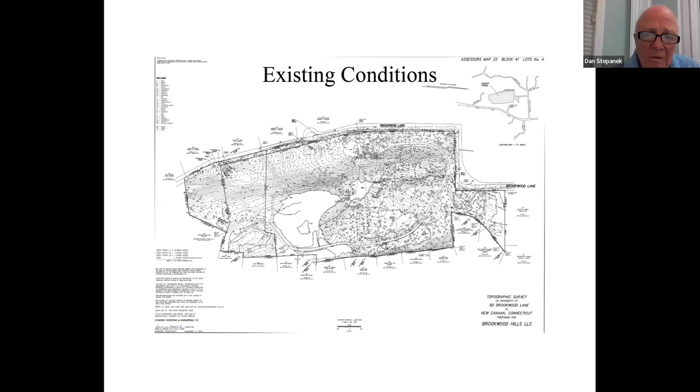I did the wrong thing first. Oh, looks like success. So did you stop sharing, or stop co-host? I think I may have logged out. We'll make sure we get him out later. I don't want to take everyone's time. I don't think Don's getting it either, but now he may. You should all be seeing the slides at this point.

This is the existing conditions survey I mentioned, just to show the layout of the existing lot. Then this is the topographic map, so you can see the low point on this lot.

Okay. Thanks all for your patience. Bill, you'll have to tell me when you want me to go.

Good evening, I'm Bill Kenny, principal of William Kenny Associates in Fairfield. I am a professional wetland scientist, soil scientist, and landscape architect. We were retained to help with this project in a number of different ways.

Initially, we were retained a couple of years ago to go out and map the wetlands on the property, which we did. More recently, we were asked to expand that work, reviewing existing conditions and not just looking at where the wetlands are, but their conditions and functions, and then help develop a plan that we believe, in our professional opinion, would have a net benefit at the end of the project.

We worked closely with SBP Homes, with D'Andrea Surveying & Engineering, and with Amy in developing this plan. Based on our review of existing and proposed conditions, it is our professional opinion that there will be a net benefit to the wetlands on the property. The wetlands will be expanded and their functions improved in certain areas, so you have a net increase in area and a net increase in function.

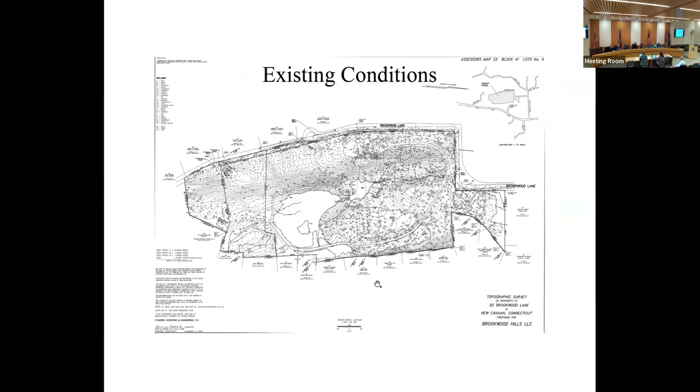So we have the existing conditions map. Now we'll go to the next map, which shows both existing and proposed conditions. North is to the right and south is to the left.

The property has had significant alterations over the many years. The existing home was built sometime around 1938.

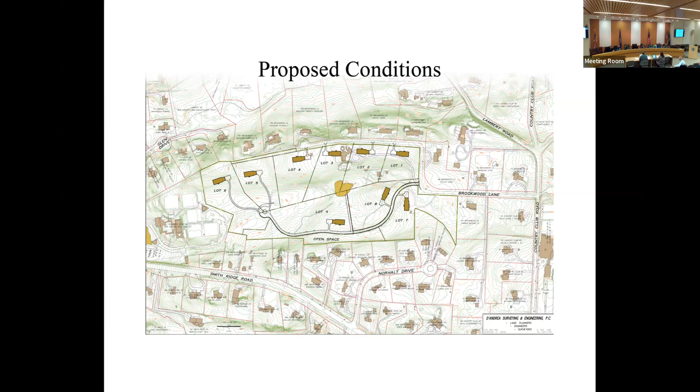Maybe we have an aerial. Keep forward the other direction, please. That's the next one. Okay, keep going. Keep going. Okay, there we go. Oh wait, did I open the wrong one? Is that the one?

This aerial photo from 1934 shows the property as mostly second growth forest with some pasture in the southern end. North is pretty much to the top of the page and south is to the bottom. You can see at the top a little bit of the country club to the north.

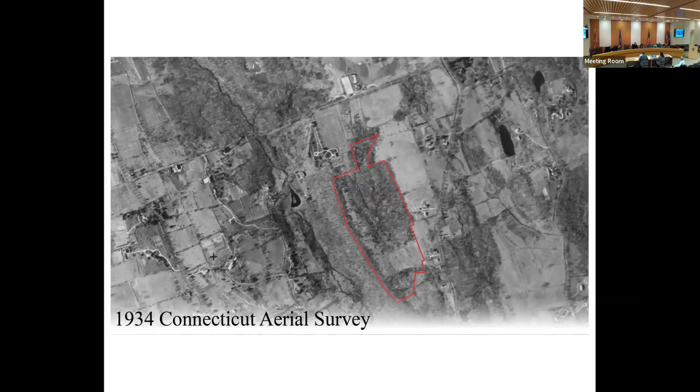The property is below that. At that time there were no significant improvements on the property, but shortly after this photo a significant amount of improvements were made, including quite a bit of work that altered the wetlands and streams on the property. We can start to go through that.

Here's an image with a USGS topographic map as well as a 1951 aerial photo on the right. You start to see the improvements to the property in these images—on the left-hand side you have the estate house on the western side, and then there's the small pond in the middle.

On the eastern side you can see the shared driveway that comes in. At that time, interestingly, that driveway extended all the way down to Smith Ridge Road, through what today goes through the field club in that area. I believe at that time it was probably the primary entrance to the estate house, extending up the east side, wrapping around the north, and back down south to the primary house on the property.

Something to note about the property is that it's really a broad valley, with a broad drainage corridor extending from north down to south. Slopes primarily drain from west and east toward the center of the property. There's a ridge line on the west and a ridge line on the east.

And pretty much all the water is draining back into the property on the site. So the various homes that border the property to the west, north, and east are either draining away from the property or they're draining onto our property. But in most cases, we're not draining to those residential properties that surround the property to the west, north, and

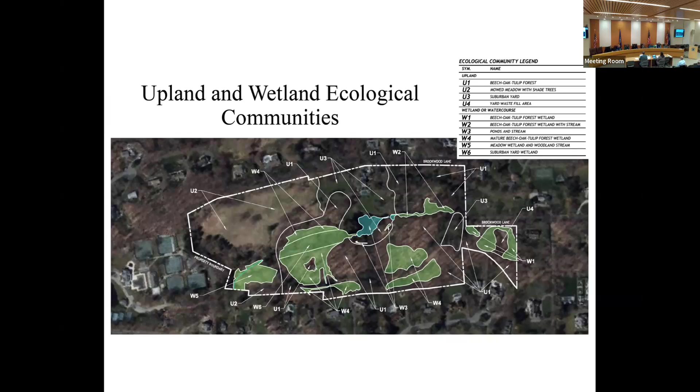So what I'd like to do now is to review with you the different ecological communities that we identified on the property. We found in general there's 4 upland communities and 6 wetland communities. We differentiate these primarily by vegetative cover, but also land use activities that affect that. So we'll quickly review through the upland and then spend a little bit more time on the wetland. Next slide.

Yeah. Oh, I gotta push my own forward.

The shrub layer is like you find throughout many areas in Fairfield County, a lot of invasive vegetation in the shrub layer. And then the forest floor, the ground cover, is a mix of invasives and native vegetation. Next slide. You got it.

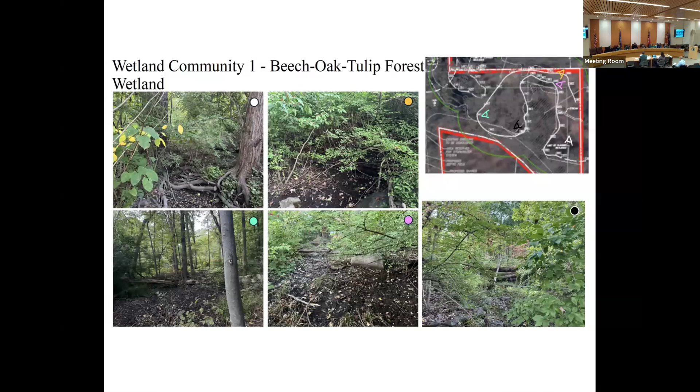And as we go down this channel and make our way all the way down to the southern end of the property, there are different piped networks coming in and out of the stream for various reasons. Some to help enhance a pond that was made, and others to drain wetlands that are nearby this stream. So they wanted to keep the water in the stream and in the ponds that were made, and in many cases get the water out of the wetland areas.

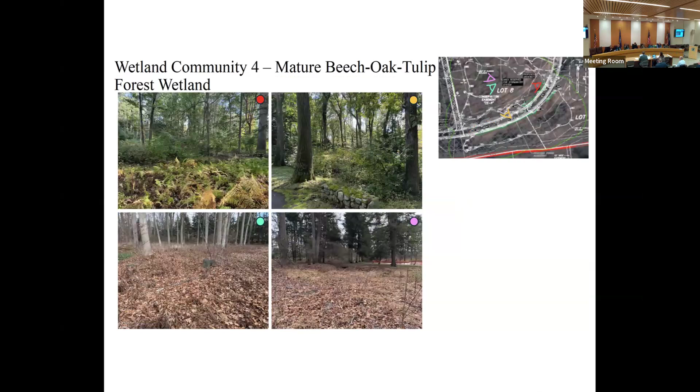So we have a number of photos as you go along. You can see where the pipes are; these short segments of walls are where the pipes are. These are head walls and end walls where the pipes go under the drive.

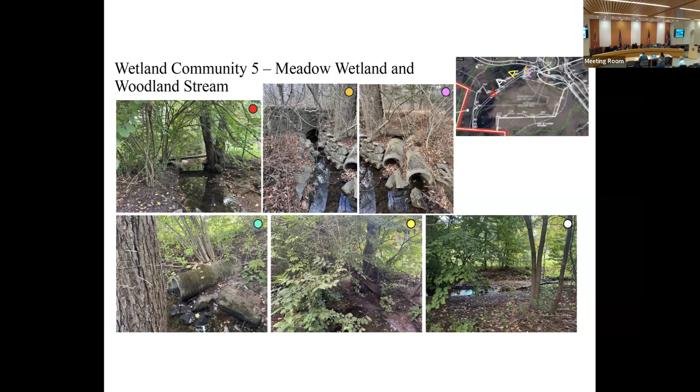And at the very end of that central drainage corridor, where the drive currently and historically came down, it ran north to south, and then it turned west to come down through the center of the property. This is where the pipes from the upper pond area come out and discharge just below where the drive crosses east to west. In this area, there's been filling around the channel, and these pipes outlet into that channel.

Immediately east of this is a wetland meadow, adjacent to the upland mown meadow on the property. This meadow is similar to that suburban lawn wetland where it has been drained in many cases, and there's a shallow layer of fill. Those improvements were done to make the meadow pasture more usable for past farm uses, so it's much drier than it historically would have been. It's in the southeast corner of the property, an old altered wetland meadow area.

So that's a summary of the existing conditions information. Under proposed, they're proposing improvements to the existing driveway. For the majority of the driveway, it includes expanding the width from 14 to 18 feet.

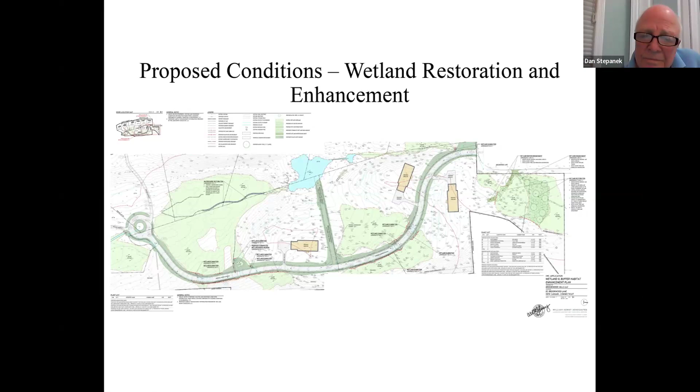Thank you. Commissioner Sanford? Yes, hi. I guess we're looking at reduced copies of some big maps here. We had two maps that we merged together to create this map. I just have a pretty basic question as to how I can make out where the existing driveway is and where the new driveway is. I think I can identify the new driveway, but I'm not clear on that on the early map.

Let's go to Lon's plan. Let's go to Lon's. Okay, this. So, trying to see what the easiest one is for you to see. If I can sort of explain, you can kind of see it. See existing conditions map. All the maps are online, so you can zoom into them. That might be easier for you.

But basically, the only part of the proposed driveway that doesn't follow the existing driveway is right when you first come in the stone gates. And that's because the fire marshal wanted a different angle when they come into the property. So there's just a slight area there where it does differ from what's existing. And then it follows the path of the existing driveway all the way through.

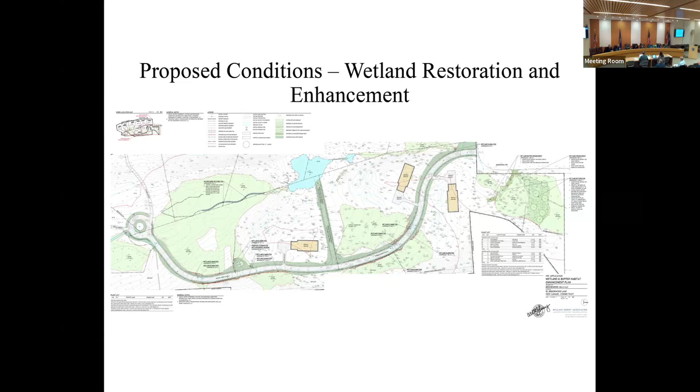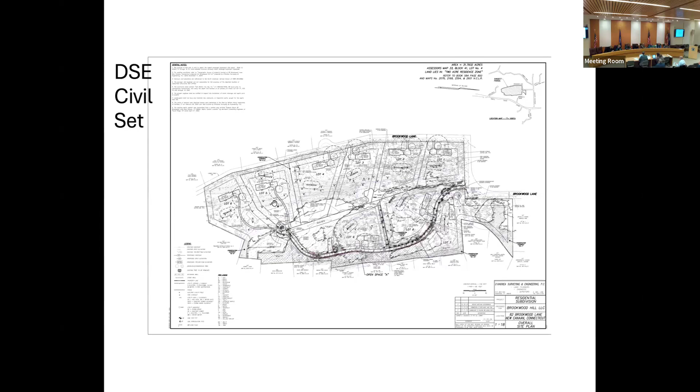Sure. Really what it comes down to is we're trying to use this. Let me go to the proposed survey. So part of what we're trying to do is, in particular with lots 1 and 2, I'm sorry, not lots 1 and 2. Are you able to zoom that in? Let's see. There you go.

All right. So in particular with the last 2 lots, the 2 furthest west lots, 5 and 6 on the map that we're looking at right now, these 2 lots actually have their legal frontage, and this is more from the zoning standpoint, on the access way that you see to the west. So the alternative would be to bring in driveways through there, and as you can see, even from this survey, a number of trees would need to come down through that area.

Or there were other plans that I've seen in the past that had driveways coming more through the center of the property. So there are alternatives that we have looked at, all of which involved more disruption to this property. And the point being that, as Mr. Kenny began his presentation, the wetlands on either side of this driveway are not good quality wetlands right now. So anything we can do to improve them is an improvement, but by keeping this area, we're not going into a new virgin part of the property that doesn't have any development on it right now.

Right, but if I'm looking at lots 6 and 5, they could actually, as you said, be accessed from Brookwood Lane, which would mean that you didn't need this big roadway, the 18-foot driveway that goes right through the wetlands, to extend as far. Because for lot 9, you could end it pretty much where the entranceway is shown on lot 9. And that would be a significant reduction in the square footage of this access way and increased square footage of the wetlands. In addition, I know there's an existing driveway in part into that area, we did walk that on the site visit. Sorry, Kathleen Holland for the record.

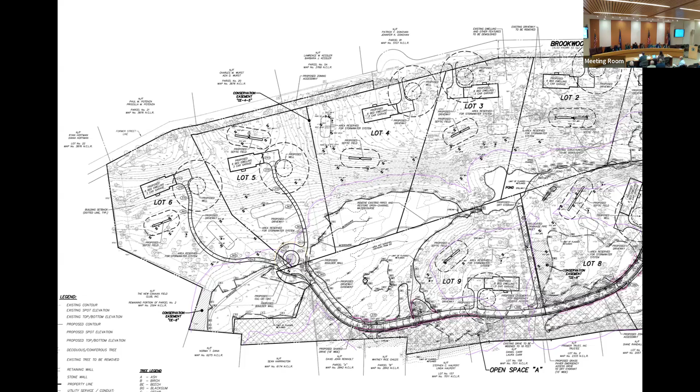I have a question, Beth Sanford. You mentioned that if you were to access through Brookwood for those 2 lots, it would require cutting down more trees. Where are you cutting down trees and what is the impact there? With the current proposal? Yes. There are some trees alongside the driveway that would need to be removed that are within the area of the expansion — it's actually what we were just talking about today.

We need to get an exact number. Part of the reason we don't have an exact count is a number of the trees are already dead, so we'd like to get you a more accurate number of the living trees that would need to come down. But including the dead ones, I think we thought somewhere in the vicinity of 30, though I don't want you to quote me on that. I want to get an exact count for you. Okay, thank you.

Commissioner Redden, for the record — so when the fire marshal asked you to change, did lot 7 increase in size? No, that just changed the layout of 7 and 8.

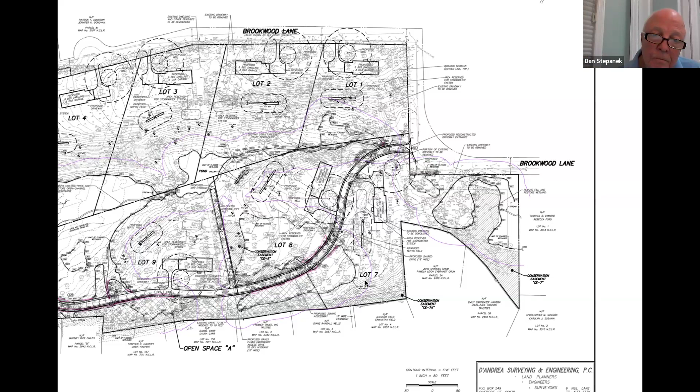He was asking you to — so it appears, looking at the old drawing, and I'll go speak to the marshal tomorrow — the curve from the old drawing from Brookwood Lane in, I can clearly see the yellow, which is probably hard for the audience to see, but the new entrance coming in, this Brookwood Lane here could easily connect and go through where your house is on this. It could connect right to the old driveway, and that's less of a curve and no impact. So as an alternative, I'd love to have that conversation with the marshal again to see if there's a proper understanding of what he's asking for, because my understanding is that the marshal said for the fire trucks to have access, you had to have wider and less radius. But that doesn't appear to be the case.

It's wider, but instead of connecting, you're increasing. But what it does do for the builders or developers is give you two better lots. In other words, if you went through what I think is lot 7 right now, on a shallow curve right into Brookwood Lane — I can tell you, as the former fire commissioner, they can access that.

Okay, we'll take a look at it. That area, correct me if I'm wrong Bill, is that moving further away from the wetlands where we've moved the driveway, right? There's wetlands to the west. Okay, so it's moving away from one closer to another. Well, I'm saying right where lot 7 house is depicted.

You've got the curve at the top going down, a little bit of an S curve. So you could just straighten that out right into Brookwood. It's a nice shallow curve, goes through where the house is depicted. I'm sure the house can be situated someplace else, but...

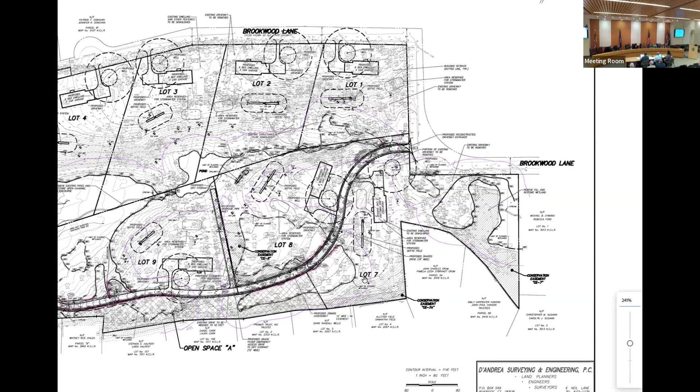Kathleen Helen, for the record, just revisiting the zoning subdivision regulations - I believe 16 feet is your minimum on the subdivision, on the driveway. Yeah, and I think if we get down to two houses, you may be right - once you're sharing it, you have to increase it. I think you're right, so you might be able to shave off 2 feet, but not 4.

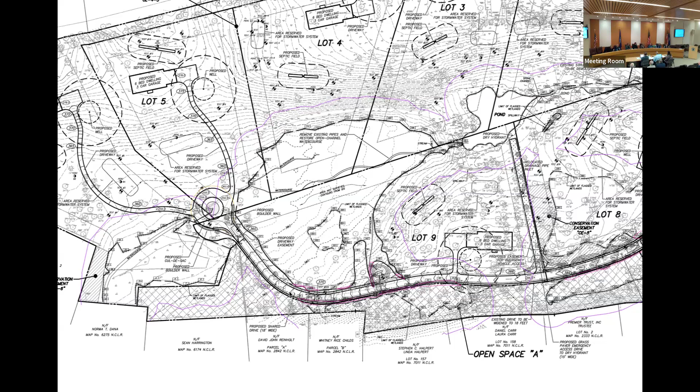Well, I was hoping to just run down through what we have done that's required of us from the drainage standpoint. We're talking approximations here. It won't take too much, I'll talk fast.

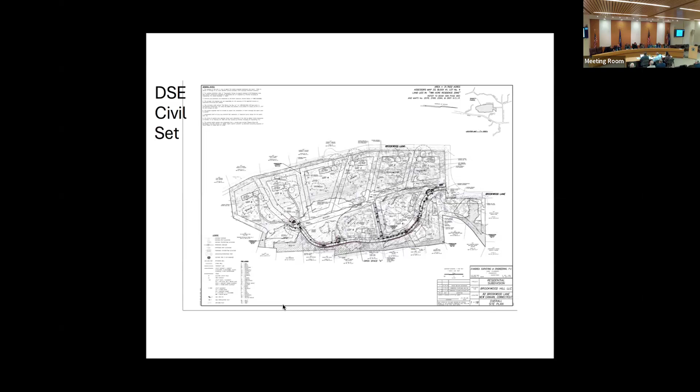Okay, so I believe slide 40 is the start of our plan and profile sheet. What we're looking for right now is the plan and profile sheets that we prepared, which in our set starts on sheet 12.

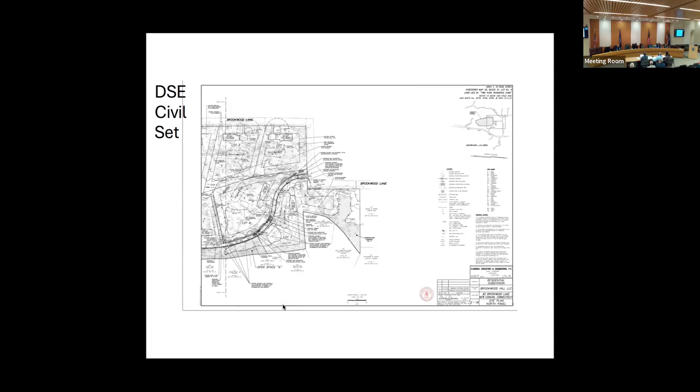Okay, keep going, let's see, keep going. So you're going the wrong way. Yep, and if you can blow it up.

Okay, as a bit of a blow up, we're going to look at sheet 12 of 16. What we did for the existing driveway is create both a plan and profile so you could see the slope of the driveway, existing and proposed, and also in more detail see the width of the driveway and how it aligns with the existing driveway.

Then what are we doing to address the drainage requirements. So as we start at station 0+0, that's 0 feet, starting right at the roadway, we have the driveway shift that allowed that existing exit point from the cottage to be eliminated completely.

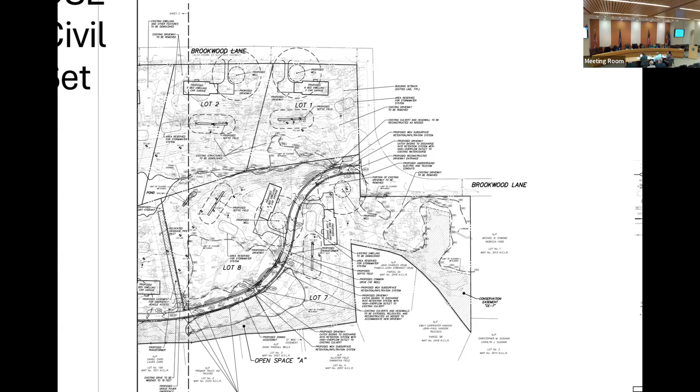And then as we move in just about 75 feet, 0+75, we proposed the first of our 2 catch basins. There are no catch basins presently along the driveway, so we want to be able to capture the water so we can treat it. Those 2 basins for water quality will then feed off to an array of 12 infiltrators, which will address the water quality volume we need to take care of.

Do you mind zooming in a little bit as you talk about those particular features? Yeah, let's see. You can use your cursor.

Okay, let's see if I see right there, I believe. There you go, right there. So that's the first set, and that's just about 75 feet into the property.

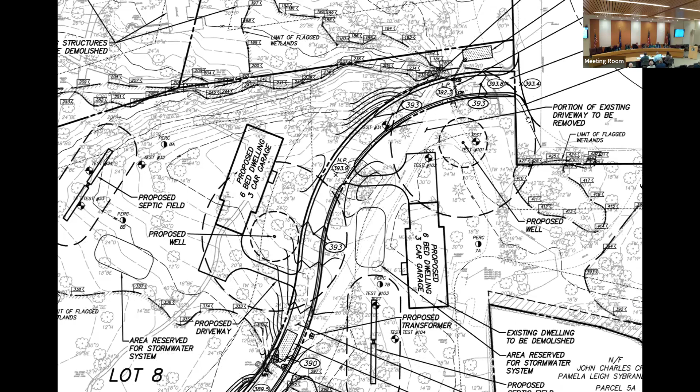You move down to about 425 feet into the property, still on the same sheet, and we come to a point where we have our next set of catch basins, two additional basins there, again feeding 12 more infiltrators. The basins, of course, are deep sumps and traps. And then lastly, on this page, at 530 feet in, are another set of 2 basins that will feed into another set of 12 infiltrators.

So going on to the next page. Oop, too far, sorry, I gotta unzoom before I can get into sheet 13. That's right, yeah. The one before that, next one. No, there... uh-oh, are we missing one? Yeah, we're missing one. Yeah, sure we can, okay.

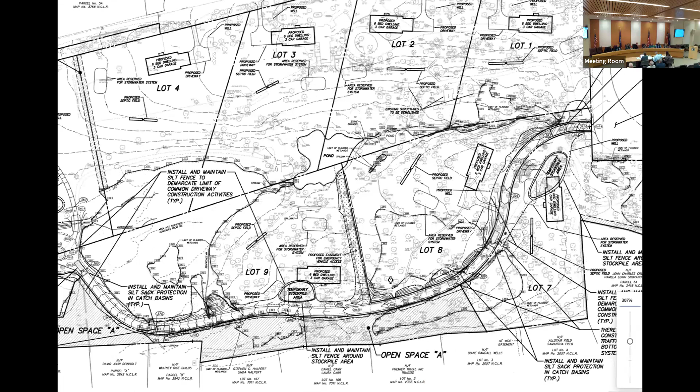Because as you get down to station 640, there's a high point in the roadway, let's see, that's just before somewhere about there, right about there. That's a point where there's just a little bit of a high point, so at that point runoff on the driveway is going in a northerly direction and also in a southerly direction from that point.

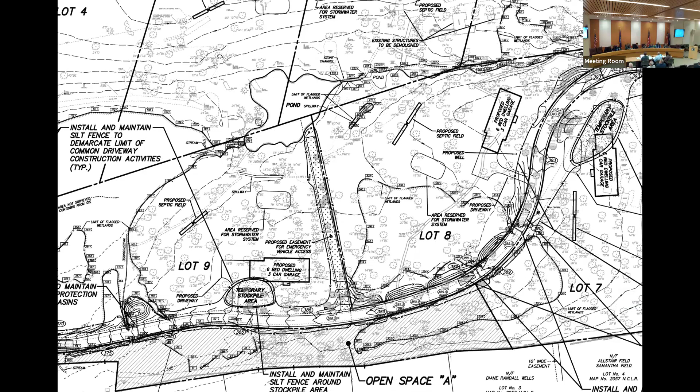Go down to 775 feet in, 7+75, right where your cursor hand is now. That's where we take off and go up to the pond, and we'll have a dry hydrant in that pond. When you talk to the fire department, they'll make it very clear there's no water available in the area, and we're going to try to give it to them from 2 different directions. This is the first—they can drive down here, go up to that pond with the dry hydrant in place. And it's not to serve just this subdivision, this is going to be available 24/7, 365 days a year.

That will not be gated. They'll have full access to this pond.

I'm sorry to interrupt, but Angela Jameson for the record, I just have a question. So where the dry hydrant is, there will be a driveway? So that's a good question.

Sorry about that, we hope they never have to use it, so we don't feel a need to put something like a bituminous pavement down. Instead, we'll do what we often refer to as grasscrete, a honeycomb section, letting the grass grow through it.

Doesn't have to be maintained at all, just so the fire department knows where it is and they can travel on it. No woody vegetation, no trees, but it'll be green. Does it require cutting down trees to create that access? Yes, there will be some trees that will come down. I don't have the exact count, but just looking quickly here, probably 6, maybe 8 to 10 trees. Again, we're trying to get that width.

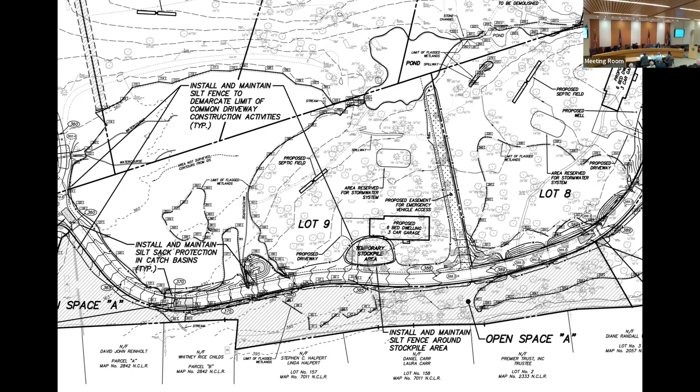Now you should have the next page. I think the way it worked out. Yep. That's okay. Go back to plan and profile. I think you can use it. Nope. Go back. Okay, go back to whatever you can get.

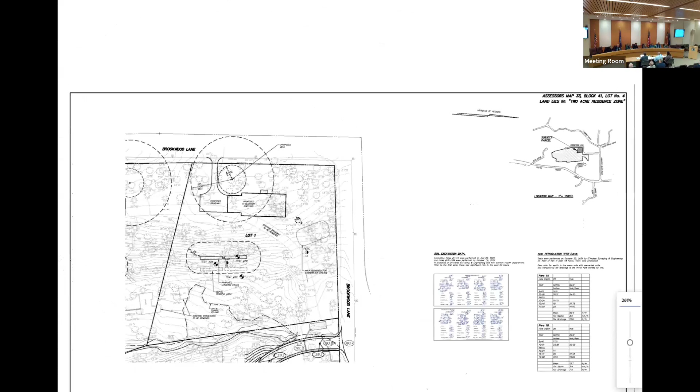So in total, we're introducing 57 infiltration units and 12 catch basins, the micro pool and the rain garden, all designed to capture, treat, and infiltrate the rainwater in accordance with the town's drainage design requirement. The other thing that came up with the first revision we made is reduce impacts, reduce the amount of disturbance. So all along that plan and profile, which are the larger scale sheets, you'll see now we've introduced some walls.

They're very low. They're maybe a foot high, but the whole idea there is just to contain it, not just for disturbance overall, but for the future. It's a demarcation feature. It works well. It will contain everything within. Even if you were to plow, it will help contain that snow as it gets pushed around within the limits of the walls. And you'll see that we have it in quite a few areas on both sides. But again, not high retaining walls, just something so that we don't have to grade out an extra 4 or 5 or 10 feet.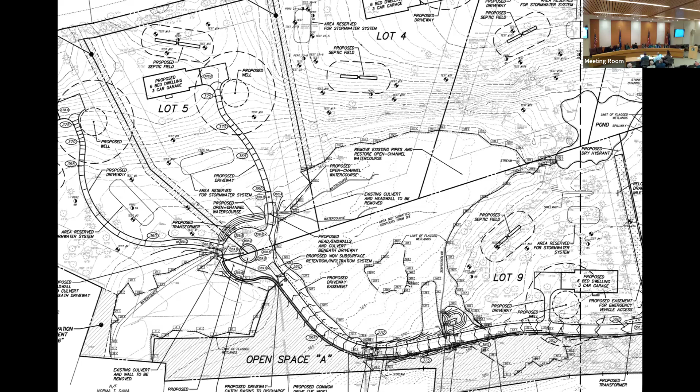That may or may not be possible. That may or may not be easy to avoid the wetlands, but that is just another thought that I had, that maybe you really don't need this big shared access way. Well, there are wetlands through the center of the property and an extremely steep slope. So, but we will absolutely look at every possible alternative. I have to say, I do think that's going to be pretty challenging.

Yeah, challenging. Is there any other information that anyone would like? What about the commissioners on Zoom, Dan Stepanek and Don Mastinardi? Do you have any additional questions or things that you would like to see? Well, I don't know. I think lot 3, I'm gonna go back to piping and water and the whole thing. I'd like to make sure that lot is buildable, okay?

It seems like there's so much stuff going on. I don't know how you can miss the wetlands. I don't know how you can miss the piping and the whole thing. So that's what's in the back of my head. I don't have a question. I have a concern about lot 3, really, and probably lot 4 too. So if you can show me that you can avoid the piping and avoid the wetlands and avoid the draining of water and stuff like that, and still build, I'm fine with it. But right now I have doubts.

Dan, I just want to chime in, Kathleen Holland for the record. So full development plans for those lots are not being proposed at this time. They are proposing to do some mitigation work with pipe removal on those lots. So at this point in the sequence, their application is pending currently with wetlands, and also for a subdivision review with planning and zoning. Inland Wetlands eventually will make a recommendation to planning and zoning regarding any concerns that they might have on individual lots.

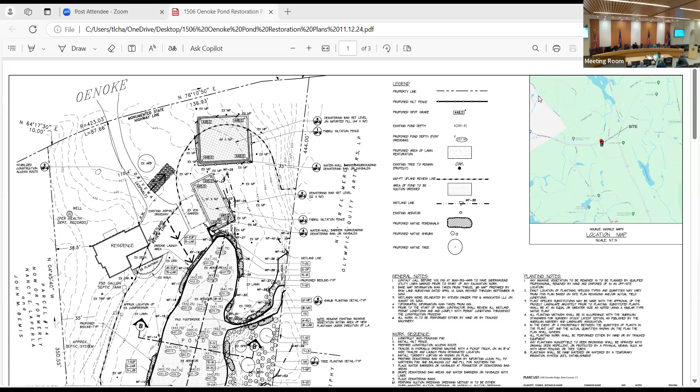There's only one tree to be removed as part of this application, and that is behind the pond. And if you recall, it's a declining, I think a declining spruce tree right about here. Yes, I've indicated it on the plan. So it's declining, and we're replacing it with new trees.

There'll be a total of 4 native trees, 101 native shrubs, and about 480 native perennials as part of this application. And also, we're going to be providing some buffer along the western shore of the pond here, just to create some buffer between the house and the upland development and the pond. So overall, it should be a really substantial environmental improvement, and we're going to be providing a lot more habitat.

Once the dredging operation is complete, the bags will be removed, as I mentioned, and any of those disturbed areas will be raked out and seeded as lawn. Any areas that are currently lawn will be restored to lawn, with the exception of where we're adding the native plantings. Also, I should have introduced him sooner, but with me tonight is Mark Amler.

He's with Pristine Waters, and represents the pond dredging company. And as Kathleen can attest to, we've done a number of projects over the years, and they've executed them beautifully. So I'm happy to take any questions, or if you have anything for Mark. Well, first let's have Mark pull up to the table there so we can get him on mic. That would be great. My questions are largely for Mark, but did someone else want to go first?

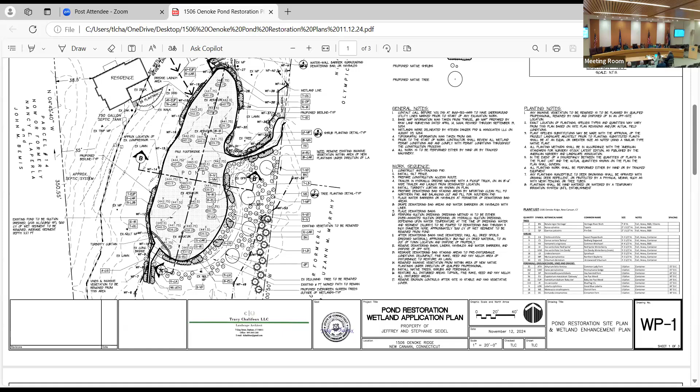So could I hear a motion, please? I'll make a motion to approve IW 24-44 with the special conditions from the staff. I second the motion. All in favor, please raise your hand. All right, any opposed? So that's passed unanimously.

Thank you so much. Thank you. No charge for the technical assistance. Thank you, Kathleen. I learn something every time. It was my first time, honestly, so. No, you did just perfect. It's intimidating, I know. Thank you, everyone. Okay. You're doing very well. 9:12.

Thank you. So item number 10, application IW-24-47, 1 Echo Hill Road, Echo Hill LLC, agent Catherine Throckmorton, Environmental Land Solutions.

Good evening. I'm going to plug this in. I don't trust the battery. Sorry, you have to kind of crawl into the table.

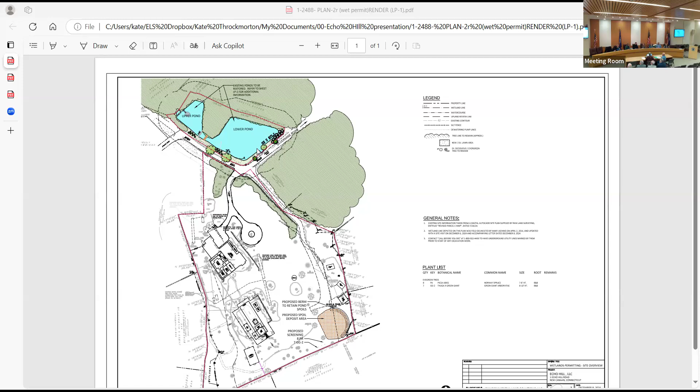So some of this material is going to come off site, and some of it is going to be moved. There is an area on the south portion of the site where we're looking to bring a portion of the material, and the rest of it will be taken off site. On sheet 2 is a clearer enlargement of the area in detail, showing the shared driveway, which runs around the south portion of the pond.

This is what I'm calling the upper pond, and then there's this little weir dam. There's also a walkway that leads to this upland area. So we have to do this in 2 sections. Gene can go into more detail on how that's going to be managed, but there is an existing island. This is all going to be cleaned out. This section is almost completely filled in. There is a brook, the Guild Brook, that runs through the site and heads south.

So we're going to add a couple of boulders to access this little island, just so you can hop, skip, and jump to that area. There are some existing boulders there today. We're just going to make them more stable and accessible. There are 2 access points, one for the upper pond, one for the lower pond, that are going to have temporary disturbance, and then they're going to be replanted with native shrubs and trees. And the southeast portion of the pond is going to get a more substantial replanting.

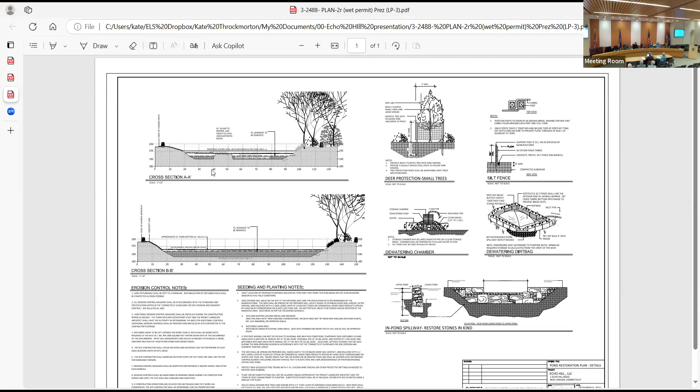The plans include the details for sedimentation and erosion control, dewatering, cross-sections of the pond, and cross-sections of the spillway that's going to be reconstructed in exactly the same way it was. It's really not holding the water right now. Stones have fallen off of it, so we're going to take the stones and reset them with new footings. So I'm going to put this enlarged plan in and allow Gene to go over any details on the execution.

Good evening, Gene Nazaro, Nazaro Inc., Redding, Connecticut. The Gears had asked me to be involved in this project. We actually did the one over at 82 Brookwood prior to this project. As Kate mentioned, the upper pond really functioned as a sediment trap or forebay, if you will. And the rock impoundment area has deteriorated through flow over previous years, just normal deterioration.

The idea would be to intercept the water where it comes into the upper pond, bypass the work area, dewater that, and start with the upper pond first. That material, I believe, can be accommodated on site in the spoil area Kate indicated on the plan. The remaining material needs to come off site. There is not enough room to accommodate that. The job itself is relatively routine for us.

The impoundment area needs to be reconstructed to the original elevation. There's no advantage to increasing or decreasing it, since it acts as a weir. And I think it should be a bit wider than the existing opening, just to accommodate heavier flows and bigger storm events.

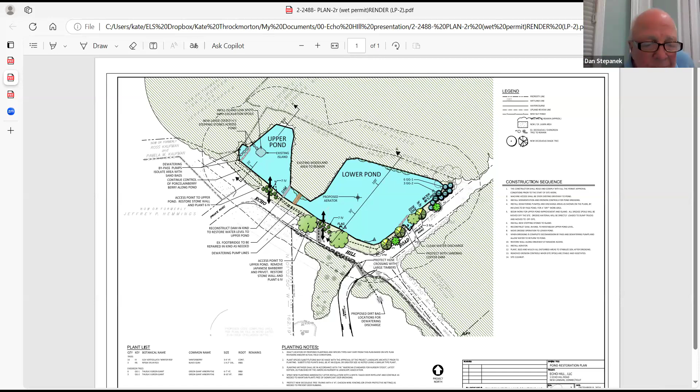You were talking about the previous dredging that was done. My recollection is it was a barge dredger. He did not go to the upper pond, he couldn't get in there. So your analysis of that weir not working, that's probably what happened. The upper pond never was dredged, that's my observation. That's the biggest problem, the sediment moved into the lower pond.

If you have significant flow and there's sediment there, it's washing into the lower pond, and that needs to be addressed. For my property, I would consider that a very important aspect of it.

Good, any more questions or comments? Special conditions, similar to the other pond dredging, the same special condition. We do have some landscaping activities on this one. Those of you who were on the site visit for this pond know it is really quite vegetated, with very large trees around the backside of the pond, so there's no reason to do anything additional there. He's not working in that area, he's not disturbing it. So the plantings Kate is proposing are appropriate to the restoration of that shoreline. I think that's a good plan. Again, I'm not a plant expert, so I'd like to have, upon completion of landscaping activities, the consultant provide a final report certifying compliance with the approved plan. That was my only special condition, if you had any others to consider.

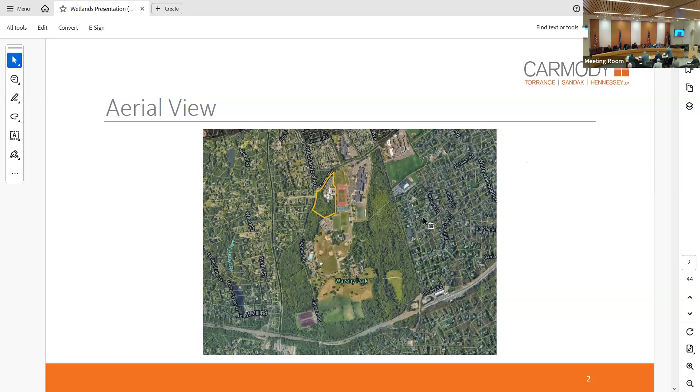Thank you, Mike. Good evening everyone. For the record, my name is Kurt Lowenstein. I'm a licensed professional engineer in Connecticut with LandTech. Our offices are located in Westport in the downtown area. We were retained by the Waveny Care Center to provide the site civil and environmental components of this project.

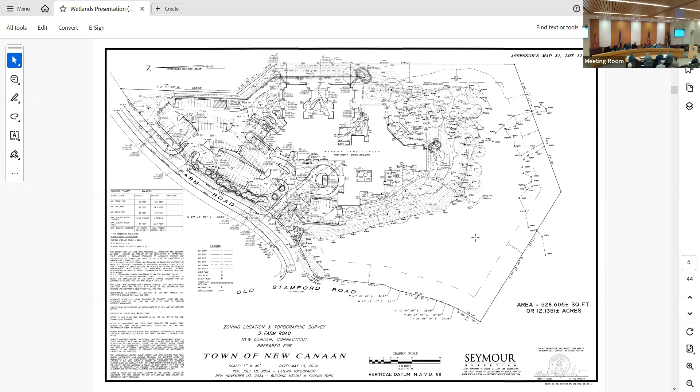As Russ so eloquently said, there's a major need for this type of use in the community and Waveny itself. So this expansion - primarily, if Dan, if you could bring up the site layout plan, if you go one, there you go, perfect - you'll see the gray area is the proposed expansion. Portions of the existing structure, where those of you that went to the site walk saw where the turnaround is for the drop-off loop, that portion will be demolished, as well as a small portion for orientation purposes.

North is to the left side of the page, and east is towards the top of the page. So on the western side of the existing structure, as you come in, a piece of that will be demolished to allow for this new beautiful addition to be put on, which we do have some pictures later if you're interested. Part of the addition, as Mike said, we will need some additional parking spaces. So there will be a parking expansion that will span as you come in from the same entry to the south, which will wrap around towards the southern portion of the building. That's the bulk of our work that'll...

Excuse me, I'm sorry. Can you zoom in? That would be great.

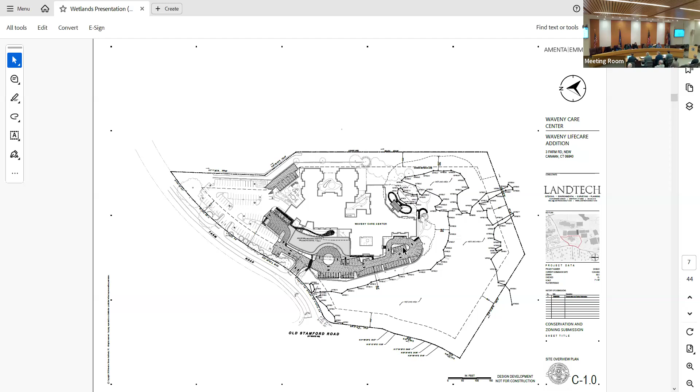It's better for me. I don't know about anyone else. Okay, perfect. Don't worry, we're going to move on to the more zoomed in plans shortly.

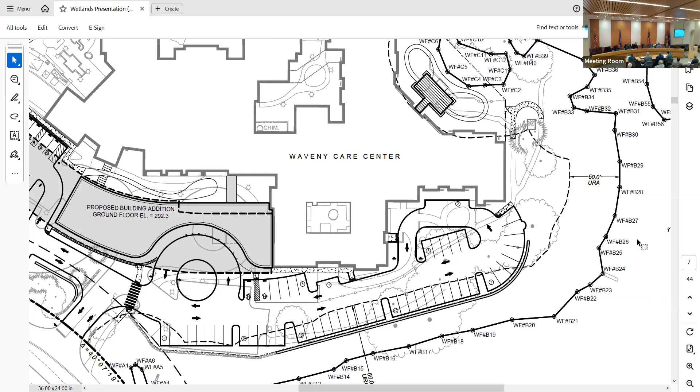Yeah. So the bulk of the area within the regulated area is this parking expansion around the western side of the existing structure. And Dan, if you could pan up to the upper left-hand corner, there is a small parking expansion that will be going on in the area commonly known as Claire's Garden. Portions of that will be reconfigured, and there'll be some additional parking over there to provide better access.

That's not within any regulated area, but this project is kind of broken up into what I think of as 3 components. We have the small parking expansion to the northeast. We've got the bulk of the development, which is the addition and this parking expansion. And then the last piece we'll touch on is the southeastern courtyard and wetland filling / creation.

So Dan, if you could go to the next slide, I'd like to speak to the stormwater management of the site. Perfect. So currently the property does not have any kind of treatment stormwater wise, but it does have an extensive parking lot that does have numerous catch basins that collects just about all of the runoff for the existing parking area. There's also a series of internal roof leaders from the building that all gets collected together into one kind of single point.

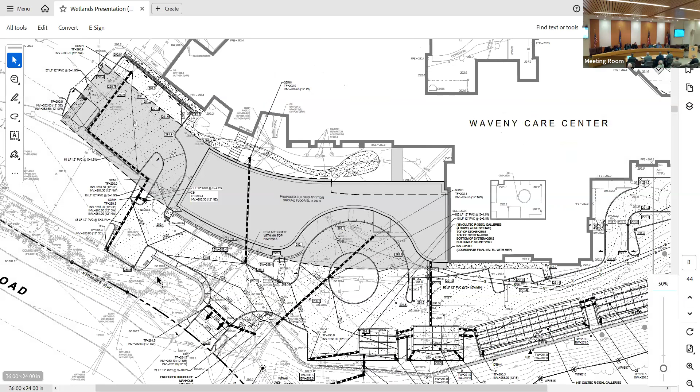And Dan, if you can zoom in on the lower left-hand corner where the driveway entrance is, and then just pan down slightly. Perfect. So right to the right of the driveway as you come into the site, there is a small wetland pocket there, and there is a series of pipes that all connect to a single manhole, and then it discharges into that small pocket wetland.

From what I can tell, looking at the historic plans for this property, it looks like there was a lot of thought and intention put into this piece that was actually intended to be a sediment forebay. So I'll speak to this a little bit later, but we've kind of taken that and we're going to expand upon it with our drainage design.

But right now, I'd say 97% of the water on the site from the building and the parking areas all makes its way into this little pocket wetland. There is an existing mortared stone head wall there with a culvert that runs through it, and that stormwater eventually makes its way into the broader wetland corridor, which is to the south of the existing facility. There are areas that will sheet flow into the wetlands, but predominantly everything's being direct piped into that wetland there.

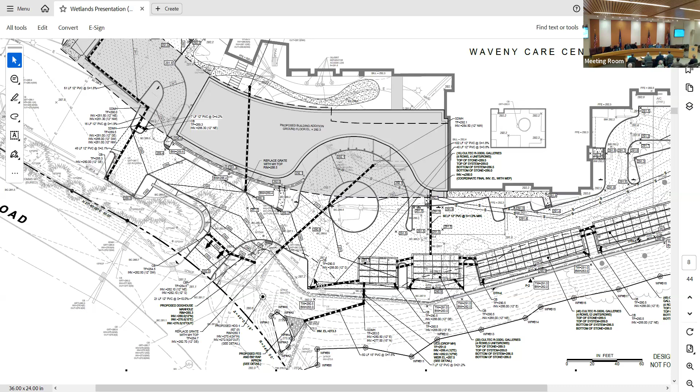We are certainly expanding the impervious area on the site, but we are providing a tremendous amount of underground infiltration for this, and that will help twofold. The first piece, especially when we're talking about a wetland sensitive property like this, is the water quality treatment of it. There's a daisy chain system, which you can see, Dan, if you pan a little bit to the right, you can see the extent of it.

There'll be a new retaining wall that'll be constructed to facilitate this expansion of the parking area. That retaining wall will be within the upland review area, and we'll be constructing the new stormwater system, which, as I said, is a daisy chain system, meaning you have 3 or 4 chunks of units, and they're all interconnected with pipes so that as water is filled into them, it can all equalize throughout and act as one unit, essentially. We've done this to work with the topography of the site and the shape of the expansion. In total, there's 144 units that'll be put in.

As I mentioned, the water quality volume treatment in accordance with the new 2024 state stormwater quality manual is being met. It also is matching the peak and volume for the 100-year and smaller storm events. So there's a tremendous benefit to this project, albeit we are working within a regulated area, but we are really reducing the amount of stormwater runoff that makes its way into this wetland. We're collecting it, we're treating it, and then we're metering it out in a very controlled manner.

We are aware of some known flooding issues on 106, not directly related to this property, but when we met with the town very early on, one of the requests was, what can you guys do to try to help reduce this issue? Even though it's not your fault, this is an opportunity to do it. And we've gone really above and beyond here with the amount of stormwater detention that we're doing. Not just for the new impervious areas, but we are collecting portions of existing impervious area from the building and from some parking areas that direct it down into our stormwater system.

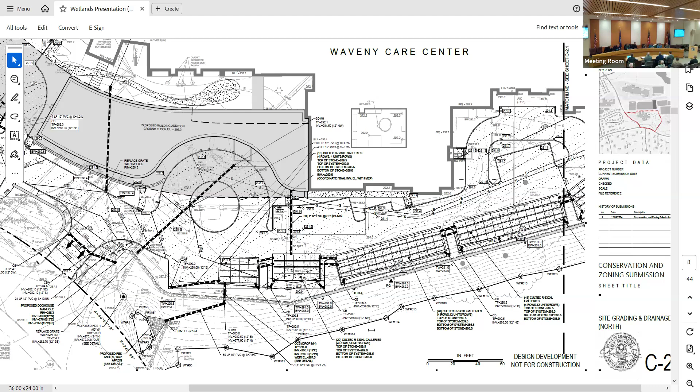The same goes for the northeastern parking expansion. That also will have a treatment, hydrodynamic treatment separator for it to treat that stormwater. I'm going to touch briefly on the utilities, the sanitary sewer, although it's not within the purview necessarily of your commission. There is an existing pump station. So Dan, if you can flip 2 slides over. And sorry, one more.

So you may know there is an existing pump station located within the wetland areas. This has been there, as far as I can tell, since the facility was originally built 50 plus years ago. We did investigate the possibility of, Kathleen had asked us early on, is there a way to get the pump station out of the wetlands? We did investigate that.

And the conclusion that we came to is to remove the amount of additional disturbance, because there is a force main that runs from that pump station, essentially, call it plan north up the page for what you're looking there through the Waveny property. We would need to trench through the wetlands, remove pipe, and it almost became more damage than good by removing it.

So the good news, the pump station itself is in very good working order. The Waveny Care Center has done a tremendous job of the upkeep on it. They have a professional company that's on call that has been servicing it for over 15 years.

One of the comments in the engineering letter that we received last week was asking for details on the sanitary sewer pump station itself. We're waiting to get some information back from the station servicer as far as logs go and some of the finer details that he knows. And I'd like to have that all included in one report rather than piecemealing it. So we would request that you allow us to work with Maria's office and DPW and the sewer department as a condition of approval should you decide to allow us to move forward.

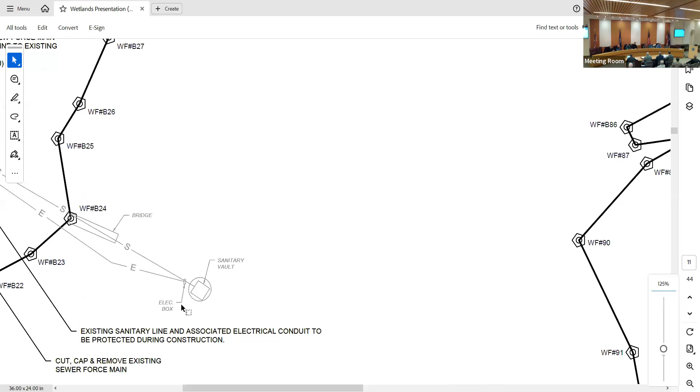Right. So all of the sewage from the facility, there's a couple of different points where it comes, but all coincides at a manhole just to the left of what's on the screen now. So Dan, if you pan over slightly. And a little bit more, perfect. So as you go up the left-hand corner there, there's a manhole that you may have seen. It was staked in the field during the site walk. Everything kind of collects at that manhole, and then one single pipe connects to the pump station that's down in the wetlands.

What's the general lifespan of the pump station? I mean, I know you said it's in good working condition, but what is the expectation in terms of when that would need to be replaced? With good upkeep on the pump station, I wouldn't be able to put a firm number on it. What I would say is, as long as you're maintaining it, it should last 75 years if you wanted to put a fair number on it. The biggest thing with the pump station is not the structure itself, it's the pumps. That's usually what goes first.

And because they have a licensed professional that's on call and is doing regular maintenance on it, I won't go too into the weeds on it, but they have a two pump system, meaning that one's operating, there's always one in reserve that's down in the pump station. And then they also have a third pump that's just sitting ready to go. If, say, during scheduled maintenance they take one offline, they can put that third pump in there. So there's a lot of redundancy built into this pump station.

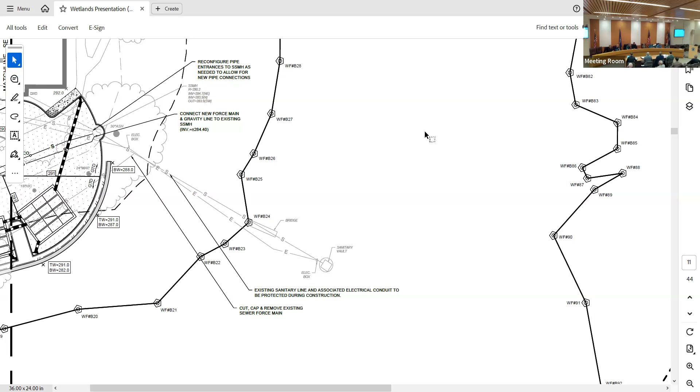It's a good break. So the stormwater piece, we've touched on some of the sanitary sewer. The last piece that I want to touch on is now moving towards the southeastern courtyard, and that's where the wetland filling and creation is going to happen. I'm going to let Anthony speak to the details of the wetland creation, but there are some stormwater enhancements that we're providing with that.

So Dan, if you can, I think it should be if you go one more and one more. Perfect. So currently, for those that were on the site walk, there is an existing man-made pond that is in the rear off the southeast. There's a small courtyard that's accessible for the residents. Because we're losing a big piece of that outdoor space with the parking expansion, this is a critical component for the facility, providing that outdoor space for the residents. Russ was adamant with us that we needed to find a new place for amenity space for the residents.

So part of that, we looked at the existing man-made pond. It's not in good condition right now. It's not functioning as it was intended. There are a few roof leaders that discharge right into it with no treatment measures of any kind. And what we're proposing to do is fill that in, and then further down the slope adjacent to the wetlands where it can function more properly, create a new wetland area. It'll be larger in size.

So just for a comparison, roughly 2,300 square feet is the existing pond, and the new wetland creation area that we're proposing is just shy of 3,200 square feet. So more than a 1-to-1 ratio of creation to filling. This new wetland that we're creating will also be equipped with 2 sediment forebays. So like we talked about with the stormwater component in the front of the property, where we have the small sediment forebay, this new wetland on either side will be flanked by a sediment forebay, which will receive the roof leaders from the existing building that are discharging now, but untreated.

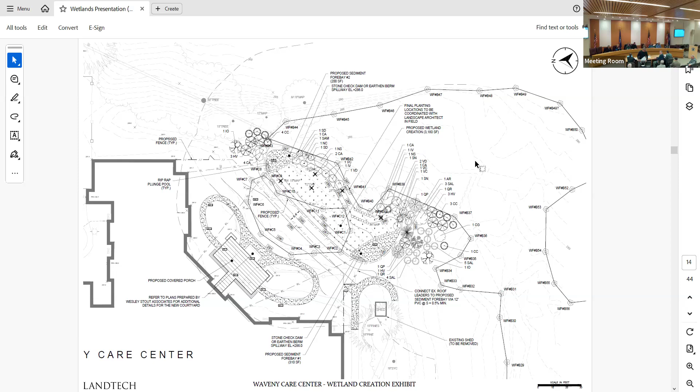All right, at this point, I'd like to bring Tom Cross up from Wesley Stout Associates, and he'll speak to more of the hardscapes and the overall landscaping, some of the buffer aspects of it. Thank you very much. Unless there's any other questions related to the civil side or environmental before we move on. Otherwise, we can do questions at the end. Does anybody have any questions at this point, or? I can hold them. Okay. Okay, very good. Well, we'll try and ask our questions at the end.

Thank you. Okay, I'll try and keep this brief. Tom Cross. Just hit your mic. Yeah, just grab the mic. Yeah, push hard, push hard.

Gotcha. Thank you. Tom Cross, landscape architect with Wesley Stout Associates, representing the Waveney Care Center, and we're located at 96 Main Street in New Canaan, Connecticut, right across the street. Like I said, I'll try and keep it brief. The first slide here, this is an overall landscape plan rendering that we have prepared.

And really for the site, there's 4 big components. There's the new building addition, the expanded parking lots that include the drainage and the drainage improvements, as well as the courtyard improvements in Claire's courtyard, as well as the southeast corner, and the new wetlands creation that Anthony just mentioned. But I'd like to focus on 2 of those areas, which are the south parking lot, as well as the southeast courtyard, because they're adjacent to the wetland areas.

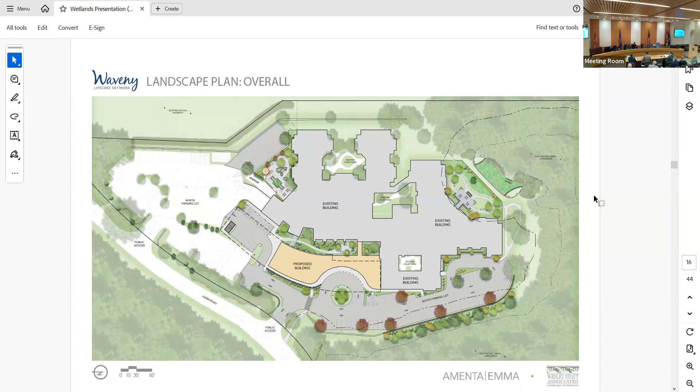Below that, those would be the new wetland plantings, and below them, we would remove the debris and invasive plants and replace them with all native plantings to reestablish this disturbed edge, as well as use an overlay seed mix to fill in any of the gaps. Now, the plant palette will be 100% native along this edge, but then as we get closer to the buildings and the building foundations, we'll use a combination of native and adaptive plantings.

So anything below the wall would be native, as well as those red maples, and any ground covers in the parking lot along that edge would be native. But then when we get closer to the buildings, it would be a combination.

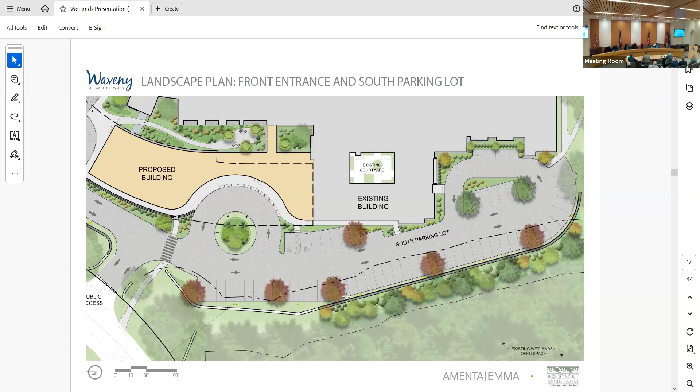Actually, in the parking lot where we have the turnaround, that is an existing courtyard now, and Waveney is losing a lot of outdoor amenity spaces that are required for a facility of this type. And so we need to expand this one a little bit, as well as improve the wetland and bioswale function. So what we've done is create a pollinator garden and courtyard concept.

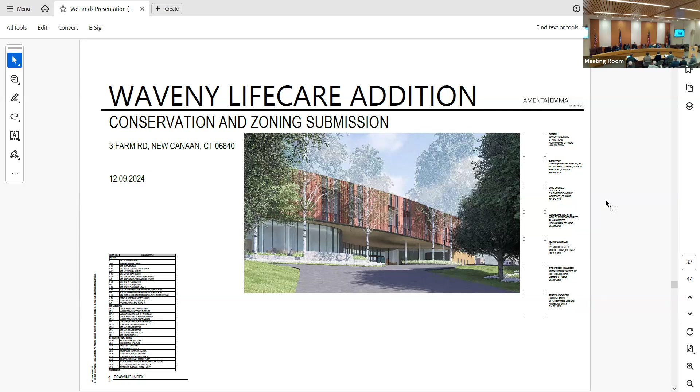Good evening. Greg Biancardi from Amenta Emma Architects. And okay, so the building, first when we set out to do this, the existing facility has to stay open 100% during construction. So seeing that, the one place to put the building was basically in front of the building, and that's why it's landing somewhat in front of the parking lot. This is a view as you approach coming up to the building. The 30 rooms have to be on one level, so they're on the second floor.

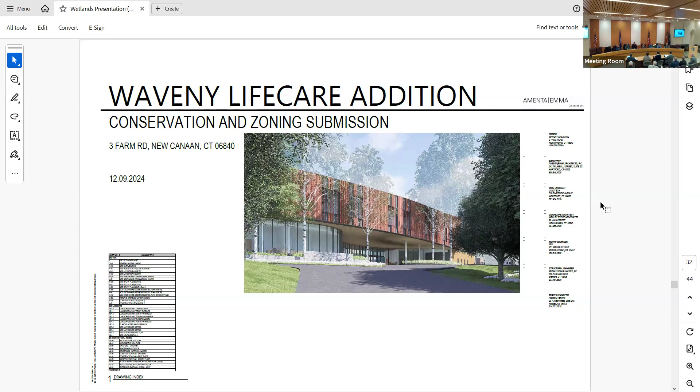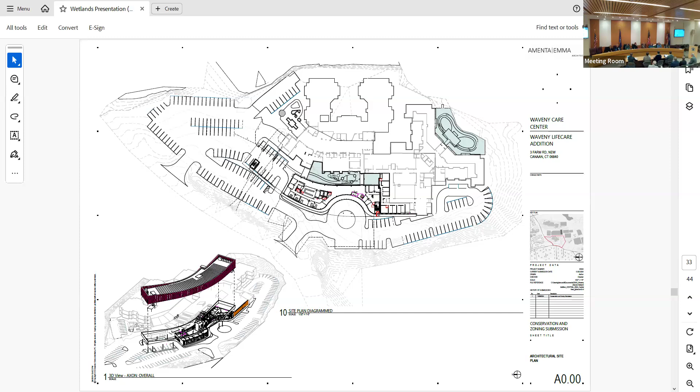The bottom floor of the building is basically a drop off covered by the building, and then a glass lobby that shows through to the gardens in between the new building and the existing building. You can go on to the next couple pages. So here you can see where that 30-bed bar is placed over the lobby area and some of the administration spaces. In between that building and the existing building is a healing garden, approximately 20 feet wide by 80 feet long, an area for some of the residents to come down and get some exercise in that courtyard. It also helps us with separation from the existing structure for fire separation purposes and so on.

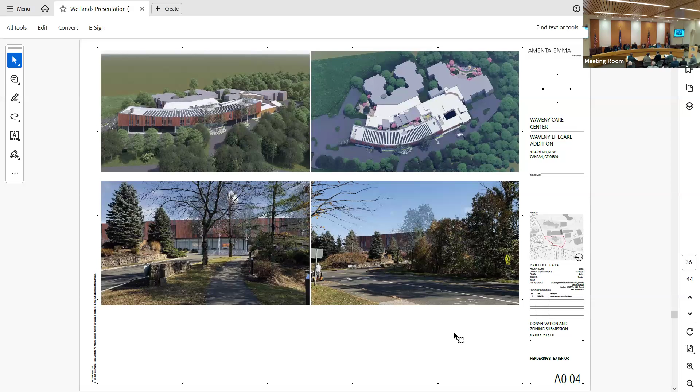Again, this is a view of the building. Go ahead. Next. And then just a few other images of the building as you approach from Farm Road coming up to the building. Actually, I can't even see that now. But another view of the building from the street, and then from above. The next slides. These are in closer to the building, again at the entrance lobby, looking below the beds, through the lobby to the healing garden beyond, and then some of the images of the healing garden that's inside that courtyard space. I think that's it.

Thank you. Could I just ask you one quick question? Do you have any green technology involved? We do. The existing facility has solar panels over the entire roof. And this building will also have solar panels across the entire facility. And there's various upgrades in terms of code, in terms of insulation and so on. We're going above code to insulate the building, so it should be much more efficient. Good. So, commission members, you have questions, please, comments?

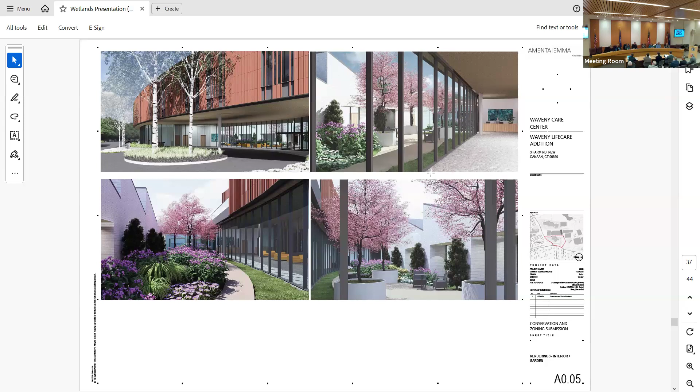Angela, I have just a general question, just for my own edification. Who owns the property across the street on Farm Road? Does the Waveny Care Center own that? The town. Oh, the town owns that. There's a little pie-shaped wedge right on the other side of Farm Road, if you will, that's owned by the town. And it's mostly wetlands over on that side. It is mostly wetlands, okay. Yes, sir. Have you thought of going up more than out on this new architecture?

Leo Carl, I've been a Waveny local resident and board chair, and I'm chairing this building committee. I'll tell you it's been over a year that we've worked on this project to figure out how to fit the 30 beds.

This goes back to coming out of COVID. The demand has been there. The state's had a moratorium on adding rooms to senior rehab facilities, interestingly enough, because there's excess capacity around the state. However, there's a shortage in Fairfield County. Russ is very good at writing letters and persuaded the state to give us a license to add 30 beds. That's how this 30 number came about. People have asked, why don't you build 90?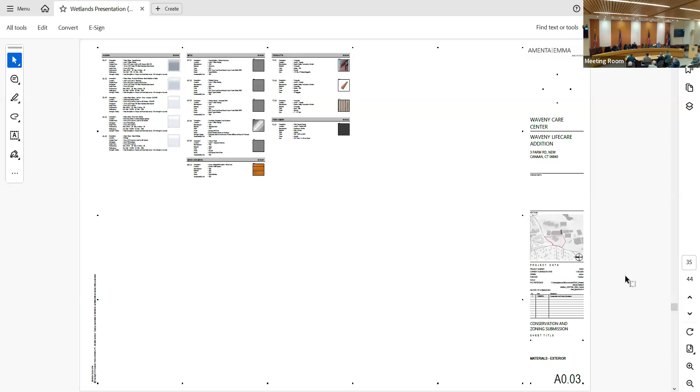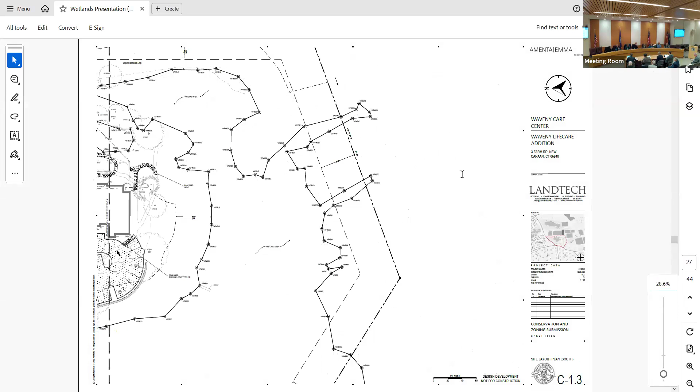Dan, can you pull up the blow up of that? That would be the wetland blow up exhibit. Actually, go back to the— yeah, and then zoom in on that. It probably shows better, honestly, maybe on Tom's drawing, the render drawing, then you can see the color differential. It'll pop out a lot easier. That one, yep, and then zoom in all the way.

So you see the lighter strip that divides the two colored areas, the two planted areas. The one to the right would be directly adjacent to the wetlands. That's the wetland creation area. So the two areas that almost look like socks on the two ends, those are the sediment forebays. And then the main body of the wetland creation is the rendered center piece of it.

Do you want to just put your mouse over what he's referring to? Not showing up. See that green, the brighter green? That looks like lawn sliced down the middle. What's to the top side of that, to the right? Where does the number 285, 286, 287 fall?

If it would be easier, if you would allow me to approach, I could show you. I think there's actually a better drawing that describes it. If you go to your survey, your property survey, maybe Anthony could just back up. This is what I was going to ask you to do, because I think that's the part that's missing a little bit, is your evaluation of the existing pond, and maybe we could show that, and then the creation of the bio.

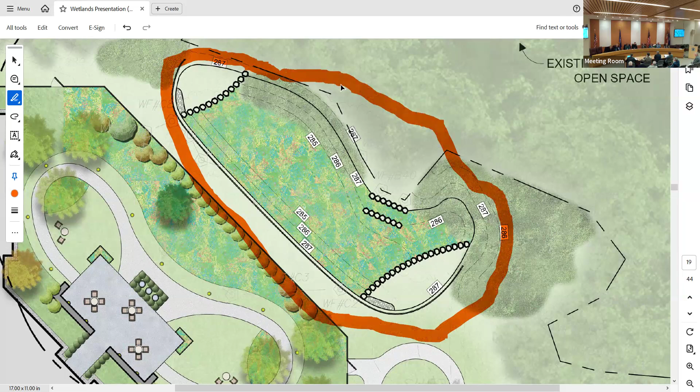So for the— oh, existing, wow. Dan, cool, let's back up to the survey. So, maybe just first tell us what you've ringed here, as you've ringed it very nicely. What are we looking at here? That's the wetlands creation area. Right, okay, got it. And that's to offset the existing, which we're going to go to right now and show you on the survey, where that is. So Dan, if you could pull up the existing conditions. But when you say wetlands creation area, what are you doing to actually create the wetlands?

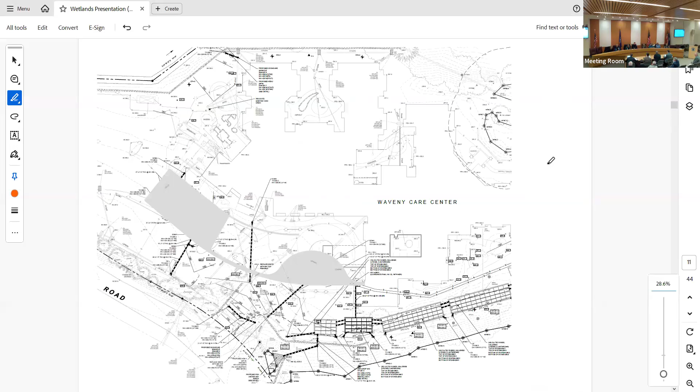This is Anthony Zumba from LANDTECH. A new basin will be constructed in the area that was just shown, outlined in red, which is very close and actually overlaps the existing pond. The new one is bigger.

It's similarly shaped so that it is a depressing area, a bowl area, and the two sediment forebays are on either end to replicate the discharge of roof drains that collect water from the building roof on that side.

So you're essentially creating a pond. This won't really be a pond. The original wetland may have been a pond at one time, since it was constructed. It essentially filled in with organic matter and was overrun with invasive vegetation, so it didn't look like much maintenance had been done toward the end. I think originally it was supposed to have some kind of aesthetic value, and then as the ring of vegetation grew up around it, you could no longer really see the pond from the garden outside and the patio. So without being able to see that pond, it kind of was just left to its own fruition.

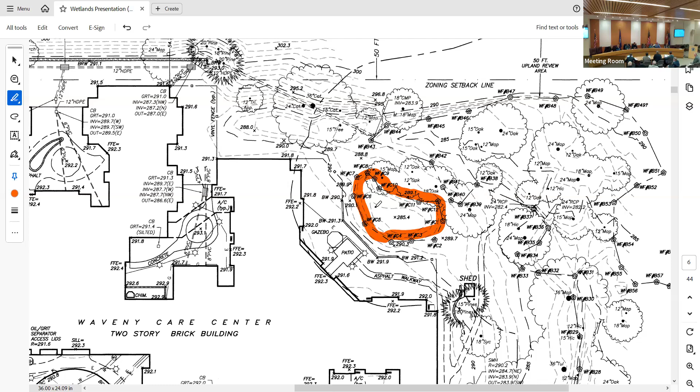Do you have a picture? Most of you have gone to the site visit. We did walk around that area. It was bitter cold, so we took a real quick look. Yeah, it truly is not functioning properly.

As part of their design concept, the incorporation or abandonment of this area is in order to make it a functioning concept for the utilization of the clients at the property. I think it's a very creative solution, as I wrote in my staff report, to accommodate filling in the nuisance or abandoning the nuisance and actually adjoining a created wetland next to a very high functioning, much larger wetland.

But I think that's where maybe they're not completely understanding. Maybe the engineering plan will show that as well. I know there are plans in here that I read through that demonstrate kind of what the final look of it will be, between Tom's plan and the engineering plan. Let's zoom in on the complete piece.

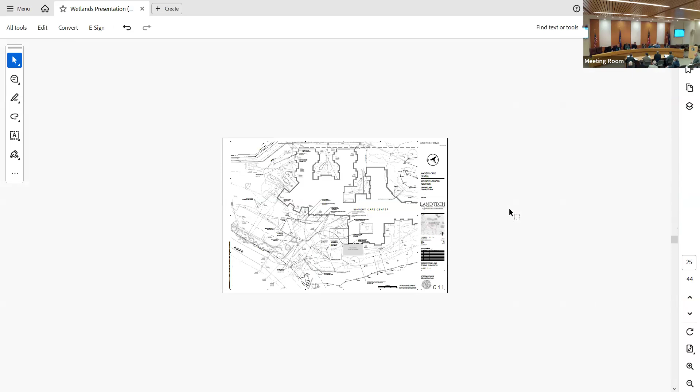Kathleen, this is Dan. Have we ever done that before in the Wetlands Commission? Oh yes, as a matter of fact I thought that question might come up, so I was prepared. Top of West Road, we had one about a year and a half ago. It was very similar to this, a non-functioning pond that had been created. It ceased to function properly. Kate Throckmorton and team put a proposal together and did partial filling and alteration of that pond, very similar to this. So yes, that's just most recently.

I'm pretty sure we've had others as well. But it wasn't this big though, I don't think, was it? No, it was about the same size, my recollection. This one, Dan, I don't think you were able to go on the site visit. This is not that large. It's like 2,200 square feet, something like that, under existing conditions.

And we're proposing one that's 3,000, just shy of 3,200 square feet. So this is the drawing, I think, is the most descriptive, if someone wants to walk through.

Let me walk you through the engineering piece of it, and then Anthony can elaborate on some of the functions and value aspect of the wetland. So what we're looking at is a depression that'll be created here, with some grading along the edge on either side - on the northern or upper side and the lower side, plan north - those two areas will be what's called a sediment forebay.

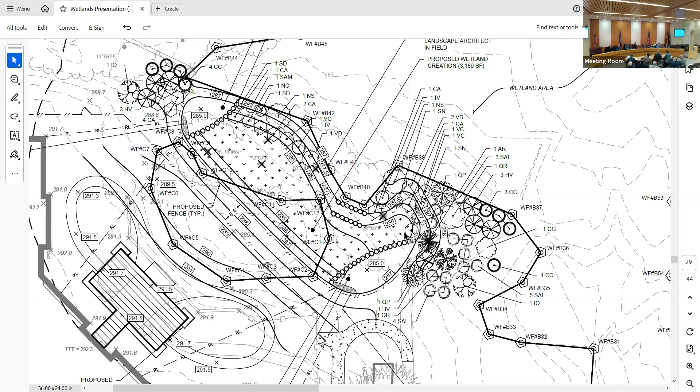So what we've done is spec'd out plants that can recreate that structural diversity, with a tree layer and a shrub layer. One detail I inadvertently left out earlier - we do have a seed mix proposed for the bottom of the basin proper. That seed mix includes a number of different grasses and forbs that are wetland plants, and many of the forbs are flowering plants that will add additional pollinator value, as Tom mentioned.

So things like swamp milkweed and blue flag iris and things like that - aesthetic value, pollinator value, and making sure that we have coverage of all soil surface to provide the sediment retention and nutrient absorption functions of the wetland as well.

Beth Sanford: What are you going to do with the invasives, the Phragmites? Are you going to try to get rid of that? Yeah, we'll definitely have to do that so that we're not in the same situation again. As the area gets excavated out to create the basin, we'll probably have to treat that soil somehow or ship it off site.

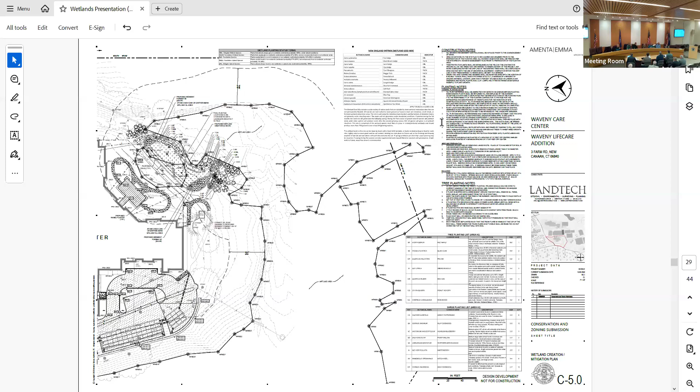Yes, go for it. And Dan, if you want to bring up that logistics plan that I sent you from FIP - I'm glad you asked that, thank you, that was one of the comments we received as well. So while we don't have a final plan, we do have some preliminary details, and Russ can certainly fill in from the facility side.

During the construction and the phasing of operations, we have an agreement with the school system to have off-site parking during construction.

We also have unanimous approval from Parks and Rec to use the Steve Banco pool parking area when it's not in operation. So we have already looked at having off-site parking so that we can have two entrances, one coming through Claire's Garden for our memory care unit, which we identified earlier. The other one coming from the south side right into the lobby of the existing skilled nursing facility.

So we'll have two entrances in full operation during construction period, and then we'll have off-site parking either at the school when the school's not in session or at Steve Banco Pool. And we have both approvals, unanimous approval from Park and Rec, as well as a letter from the school system for off-site parking. So that's how we're going to be handling the parking and not having to use any other part of the campus for excess parking. Hope that answered your question.

Well, I was thinking also in relation to when you're actually constructing the additional parking spaces, you'll have to do work, and just want to talk through what the measures are you're going to take to make sure that none of the actual construction activities and debris gets anywhere near the wetlands. Okay, sure.

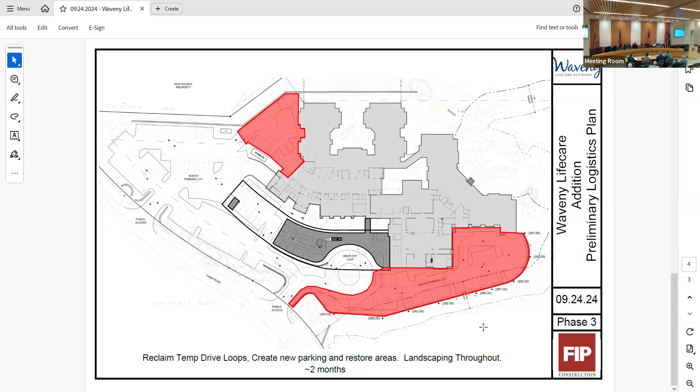Thank you. So the other issue I wanted to raise is, obviously there's a lot of... Oh, I'm sorry. Sorry, Carrie. What is the timeline? It's Beth Sanford, for the record. What is the timeline of each one of the phases? So if you go back, we're hoping to start the first phase around the fall, winter of 2025, the early 2026. Yeah, it's on the board.

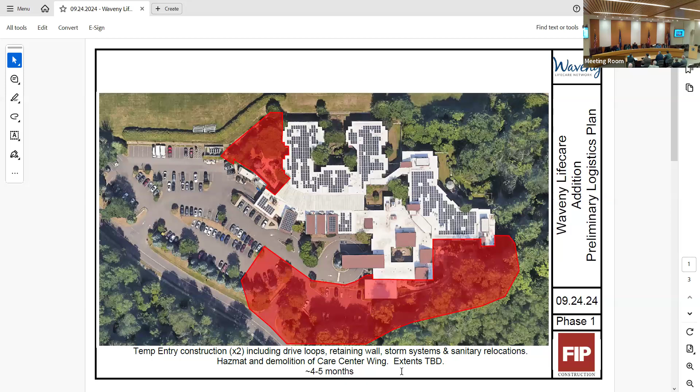It's on the bottom. It's 4 to 5 months for phase one, and then it is another 18 to 20 months for the full construction, on top of that 4 or 5 month period of time. So all in all, we're looking at like a 2 to 3 year, 23, 24 months total period of time in these different stages, getting the parking off the site as much as we can. Again, hope you can see this. We've been working on this for about a year.

There's a lot when you have a limited site, thinking about where the parking is going to go, what the wetlands are going to look like, what is outdoor spaces, how can you remain open 24/7, how do emergency vehicles get in and access your building, how do visitors easily access your building, and do I have to park and walk a long distance. So it took a long time to work through all those logistics. This is our 12th rendering.

Happy to share all 12 with you, but a lot of thought went into, as I hope you can see, we're not here presenting something and then playing a shell game or moving things around. A lot of thought went into how to keep an operation going and at the same token make it user-friendly for our visitors and especially for our emergency vehicles.

Well, as a commission, when we run up against tough ones, we ask the question, is there an alternative? And I think you just asked that. I mean, answer that question. But was there a close second to this at all? There was a close second. The close second was, as you see the building hugging, if you will, in a curved shape, the curve was going in the opposite direction, right? And it was coming out.

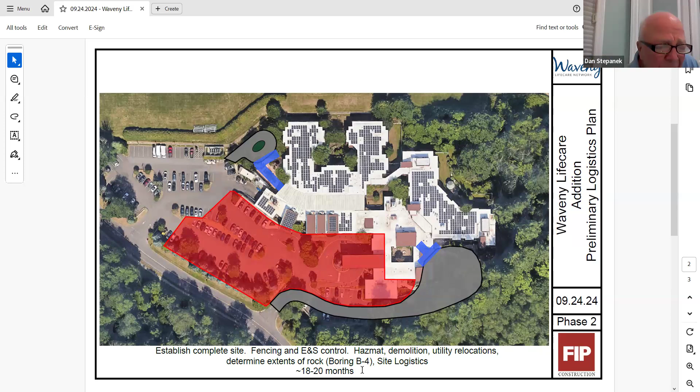That's more architecture, but what about the wetlands? Any close second on that? Well, yeah. From an encroachment standpoint to the wetlands, right, any expansion of the building, our target, as you've heard a few times now, is we needed a 30-bed expansion. So regardless of the configuration of the building, that parking expansion along the southern, or what would be the western side of the building, is going to be in any type of alternate.

The only alternate to that is nothing, and that obviously doesn't work for the project. So it really is necessitated on that. This is the least invasive. Like there was a couple of early ones that had a driveway going around the whole building, all the way around the back. Oh yeah. And this was the least invasive.

Yeah, if you couldn't hear, Leo, one of the options to your question had the driveway and a roadway going around the entire building. The second is, we heard from our neighbors and I think from the town, we wanted to do more, not only our part, our share, but if we could upgrade and hold back even more water. So this, for us, was the least invasive, if you will, on the wetlands area, and trying to keep the parking as close to upfront as we possibly could. And Tom Cross, for the record, also the proposed site wall.

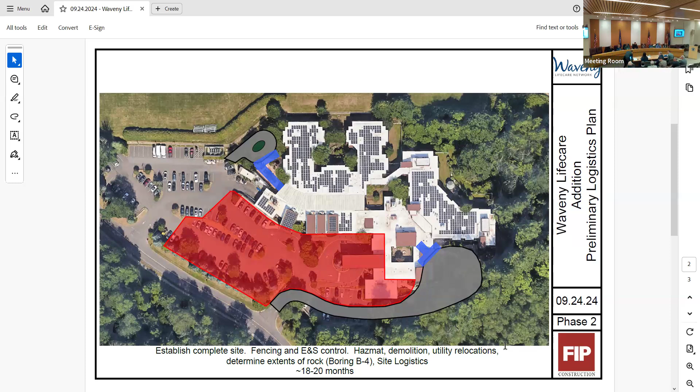Thank you, gentlemen. Maria Coplet, for the record. My comment memo, while extensive, if you think about it, it's actually taking the project to the next step, which would be a building permit. So the items in my letter by no means are anything that I noted that would be a detriment to the project to adhere to. And it is my understanding from the applicant that they actually don't have concerns with being able to respond to those comments.

Really, it's basically my request to get on record their plans, documenting sewer reports, stormwater management, understanding the proximity to that wall, I just want a structural engineer to be able to evaluate that for hydrostatic pressure. So I don't have any concerns. I just wanted it all written out there so we do get a response that's on record. Thank you. And does the applicant have any response at this point?

We actually did, and I understand the late nature of the response, but we did actually respond to all of Maria's comments, and I did have a conversation with her earlier in the day, just to touch base on some of the things. We have no objection to any of the comments that she's raised. Frankly, a lot of them, like she said, are to a benefit of the project. Most of them are detail or plan call out related, which are easily addressed, which we have, and tomorrow you'll have a nice updated package, plans and drainage report, and the O&M report was one of the other requests that we've responded to as a part of her comment letter.